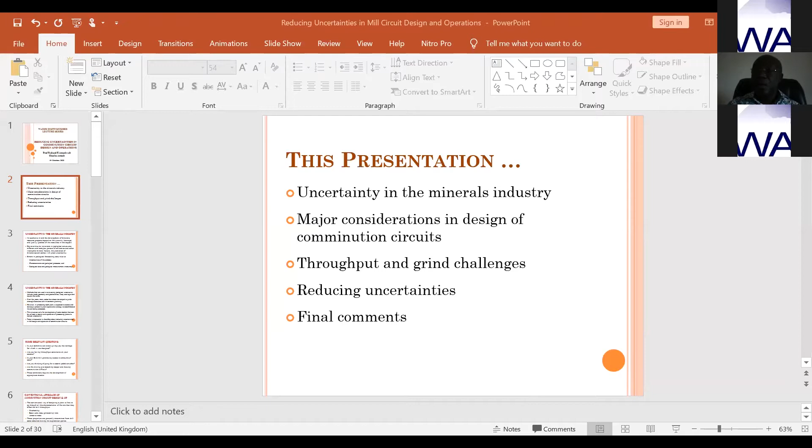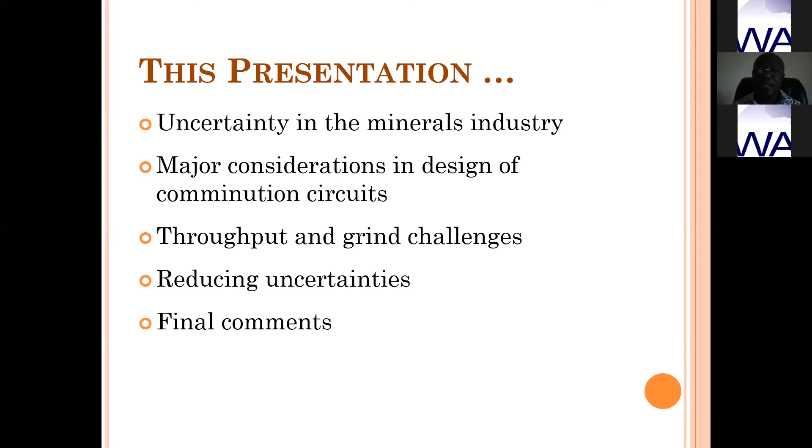As we are all aware, investments in the minerals industry normally depend on the tonnage available, and we are looking at uncertainties associated with issues in the minerals industry. We'll consider some design issues and talk about throughput and grind challenges that we face every day, and we will see how we can reduce some of these uncertainties based on work that has been done in several processing plants. I'll give some final comments.

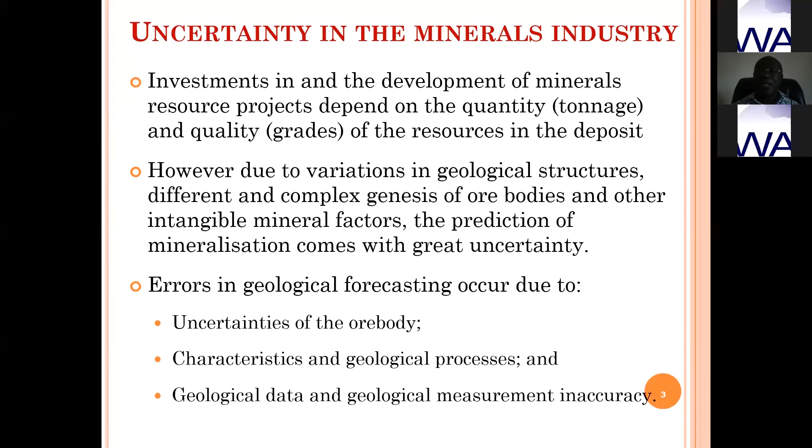We all know that investments and development in the minerals industry happen to be dependent on the tonnage available and also the grades. There are so many uncertainties associated with determining some of these variables, mainly because of uncertainties associated with the ore body itself, whether it is homogeneous or heterogeneous, and some geological processes that sometimes are not very clear to human beings. And of course, sometimes there are inaccuracies in the gathering of geological data and measurements. These uncertainties sometimes bring challenges, and human beings try to find solutions.

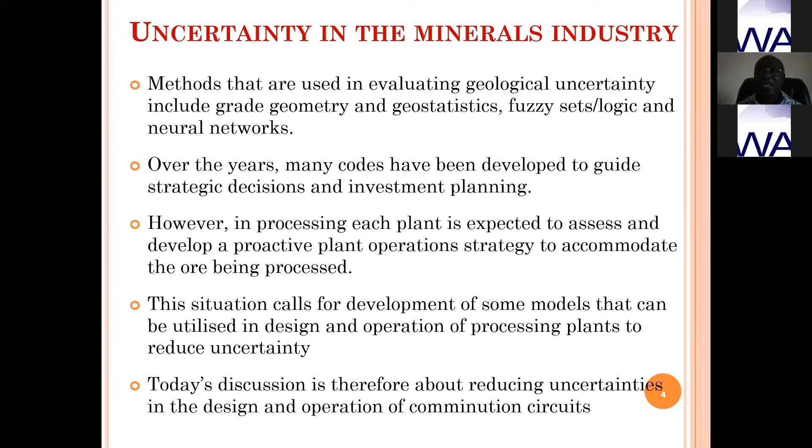In the geological and mining arena, several models have been developed. People use geostatistics, fuzzy logic, neural networks, and over the years some codes have been developed, some from the US, Australia, Britain, and several places, which guide strategic decisions and investment planning. But normally when it gets to the minerals industry, especially when you go to the plant, we don't have many models that help us reduce uncertainty in the design and operation of comminution circuits. Therefore, this presentation is about some of the work that has been done and how we can maybe steal some ideas here and there to help us run our comminution plants.

Some relevant questions come, and maybe these are rhetorical. Is your comminution plant or circuit giving you the tonnage for which it was designed? There are times you design a comminution circuit to deliver 1,000 tons per hour, and for 6 months you have not even been able to get 900 tons. Do you have constraints on your screens? How do you select your screens? For instance, is your SAG mill generating excessive amounts of scats? And are you thinking of going for a second pebble crusher?

Are your mining pits becoming deep? And does it make comminution difficult? These conditions require the development of appropriate models to solve them.

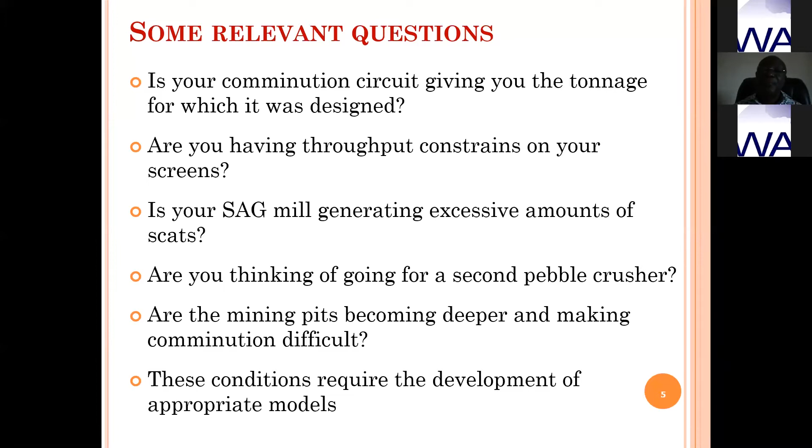Conventionally, when people in the projects team are asked to develop a comminution circuit, the normal thing would be to go for core samples, sometimes quarter cores, half cores, and the grindability is established, the crushability is established, and also the abrasive index, so that we will know the energy required to go into the comminution circuit, in addition to how the rocks would play on the liners regarding wear.

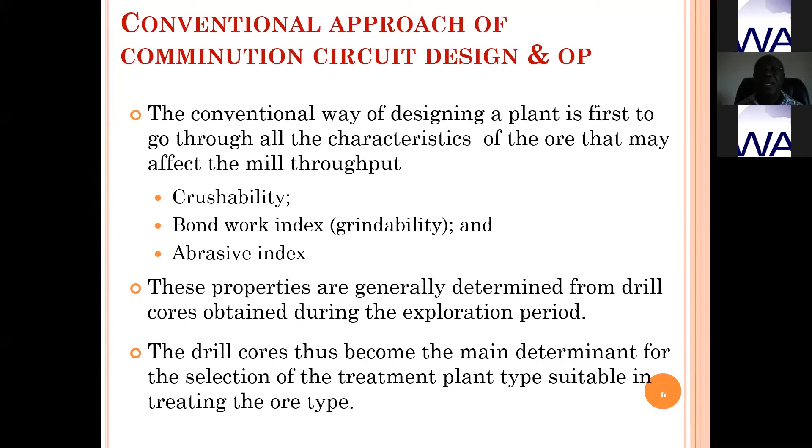These properties work very well, but you and I would agree that all characteristics change as we move from one horizon to the other. And it gets to a point where the initial inputs for the development of the plant virtually become null and void, and it becomes necessary to rethink this whole business.

There are times, as pits become deeper, rocks become harder, and they impact negatively on mill throughput. For most processing plants, if something like that happens, the rocks have become harder, the Bond work index has changed, and therefore the available energy from the mill motor is not able to grind to the size that we want.

One of the simplest ways would be to push in additional energy. Go for some mobile crushers, crush finer, so that we can feed the system and get it going.

Since we know that sometimes you may have to bring in a mobile crusher, or sometimes you may even think of a secondary crusher to support the SAG mill operations, it is important that we think through this process before we hit the ground to design the plant.

Because in some cases, maybe 5 years down the road, 10 years down the road, you'll still have some ore available. They have become harder. You want to bring in a secondary crusher, but the space has not been made available for such a machine. You don't have the footprint.

And even if you have it, sometimes the place where you will put your conveyor so that this secondary crusher can be fed and also for it to deliver its product, becomes a problem.

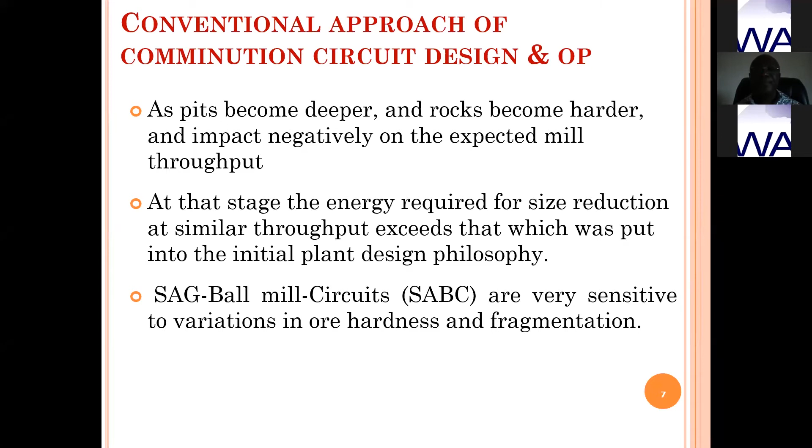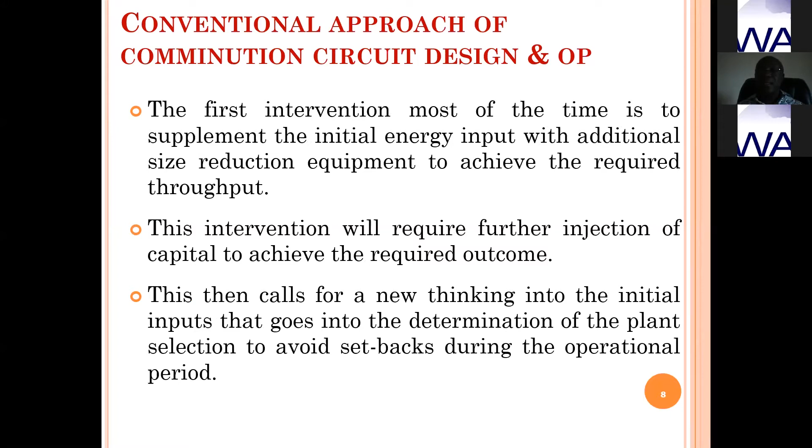So you go in for more energy, you inject more capital, sometimes unplanned, and these things require that we rethink to avoid setbacks. Let's look at the typical horizon.

That is practically not possible. But if you are able to get drill cores from between 200 and 300 meters, then it will help you to predict the type of material that you have to process and the strategies you can put in place to take care of it. The question comes up that, assuming you drill to 250 meters and you use the information available to design your plant,

what happens if the pit becomes deeper and you go down to, let's say, 300 or 350, because these are realities. Pits can go down sometimes even to 350, 400 meters.

The fact that you did not take samples at that depth to analyze them and to incorporate them into the plant design brings an uncertainty. So how do we handle such uncertainties? And what effect has it got on the comminution circuit?

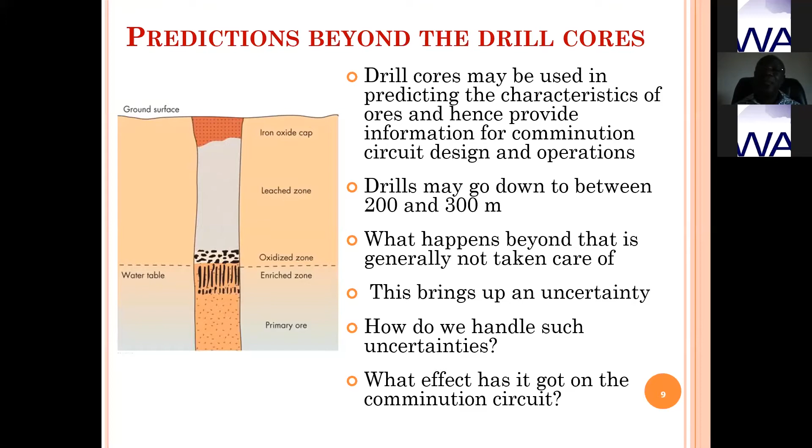Let us consider some studies that we have conducted and some new approaches that people have brought up. And in my case, some of the research I've also done in the area.

We looked at a plant where before the design came up, drilling was done up to 273 meters. And the mineralogical investigations were done and the geometallurgical mapping was developed. The recommendation was a SAG ball mill circuit, SABC.

And after running the plant for about 5 years, we realized that the plant could not deliver the tonnage that it was expected to deliver. An expansion project was commissioned, and for the initial 6 months after expansion, problems, and more problems.

Can we avoid such situations? By looking ahead in our design.

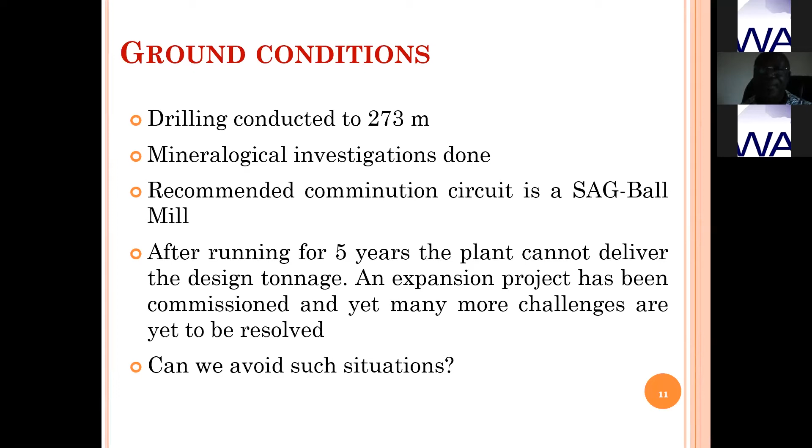These are some mineralogical investigations that were done as part of this study from the core samples that came. And you can see that we have fresh material. This is maybe sample A. You can see that the minerals are predominantly feldspar and quartz, making up almost about 80% of the material.

This is fresh material. And from the geometallurgical point of view, this is going to be a very hard rock, fresh rock. And the bond index of these materials were always above 16 kilowatt hours per ton.

Then this profile also was developed where we had minimal quartz, minimal feldspar, but a lot of goethite, that is iron hydroxides, hematite, kaolinite, pyroxene, chlorite. These are all very weathered material, very soft material, indicating that some parts of the ore body were very weathered and soft, sometimes with work indices below 10.

And then you have the very hard ones with work indices beyond 15. And then we have the transition material, which have a mix of hard rock and soft rock together.

If you see the mineralogy this way, then we have to be informed that we have to plan ahead, looking at the fact that we have a lot of fresh rock, which would one day require excessive energy to reduce particle size. These ones are easy, you can always grind and then mill easily without a problem.

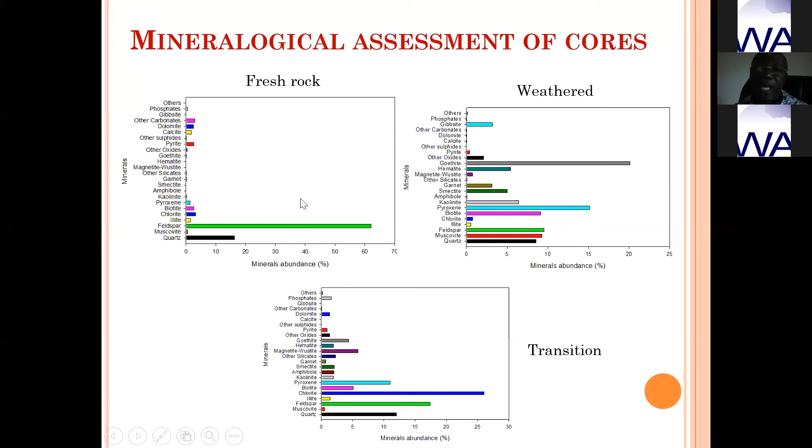But the fact that we have some ores that contain about 60% feldspar, very hard rock, almost about 15% quartz, also very hard, gives us an indication that we have to plan and make provision for hard rocks along the line.

From that study, we took about 45 core samples down to a depth of about 242 meters, and we performed bond work analysis on each of the core samples and came up with a relationship between the bond work index and the depth.

Excel gave us a nice equation. Thank God I didn't have to do this calculation. It is normally known that if you are using a polynomial equation, the more you go up on the order, the higher the accuracy, because the R squared becomes better.

But in this discussion, we realized that after modeling with a polynomial of order 2, 3, and 4, order 2 was the best because it had a lower error. For order 2, the mean square error was 0.5. For order 3, the mean square error became much higher, that is 2.4. And for order 4, it was even worse.

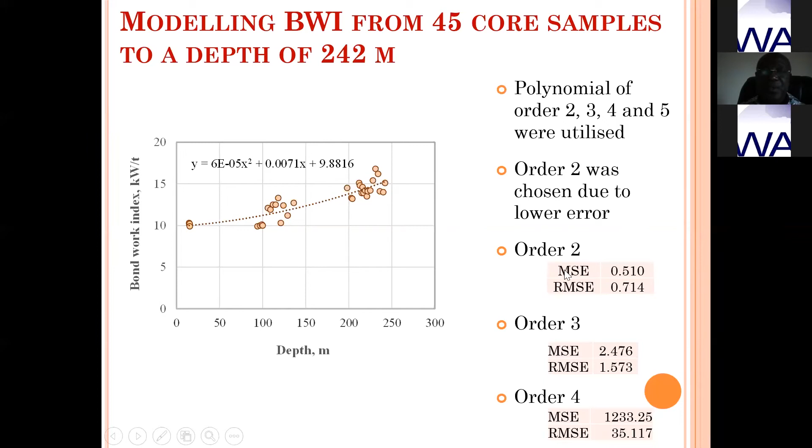So after running the statistical model, we arrived at the fact that it is better to use an order 2 polynomial to come up with the equation, and this is what you see in the graph here. This is the process that we went through.

Normally in this statistical modeling, you start with training data, which will take about 80% of the data that you have, and you develop from there. So out of the various core samples that we had, from a depth of about 14.6 meters down to 240 meters, we developed the bond work indices in the lab and then used the equation we developed to predict.

It came out clearly that there was some amount of relationship between the predicted and the one observed by ground truth. The error margins were developed and the error squared comes here, giving us a mean square error of 0.7. The root mean square error is here, and the various parameters to check for quality are also here, the R squared.

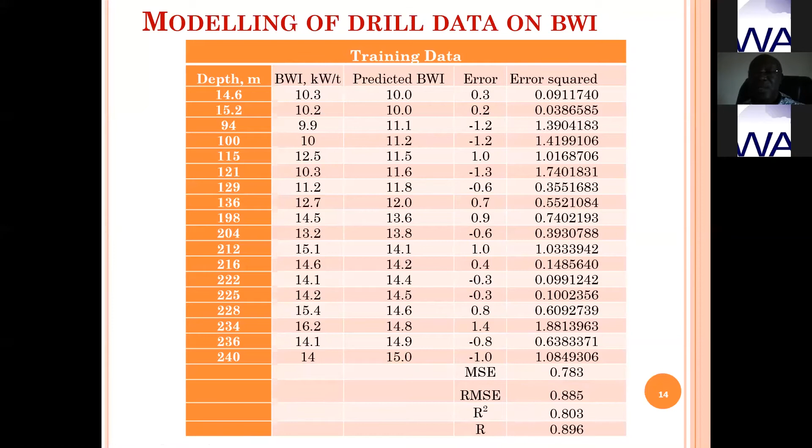After working with 80% of the data, we wanted to validate the results on the remaining 20% to see whether this equation works well for us. So in the validation model, we worked from a depth of 243 meters right down to 273. These are the ones obtained in the lab, and these are the ones that were predicted.

It can be seen that there is near parity between them. For instance, here, the one developed in the lab gave us 15.1 as bond work index, and the predicted one was 15.2, an almost close figure. Some of them went off a little bit, but to a large extent, the mean square error was 0.5, which is very acceptable in situations like this.

Based on the success of the validation work, we tried to find out, assuming you drill down to 273 meters, what will happen as the pit goes deeper. For instance, what would be the work index at 280 meters, 300 meters, 350 meters? It was realized, based on the model, that if you intend to work your pits to a depth of about 350 meters, you should expect to meet rocks of hardness about 19.7.

This means that when you are building your plant, 350 meters down, depending on the mine plan, could be 10 years or 5 years down the road, depending on pit development. But the metallurgist should have it in mind that one day along the line, if the plant doesn't close down, you'll meet rocks of hardness about 19.7 BWI, that is the bond work index in kilowatt hours per ton.

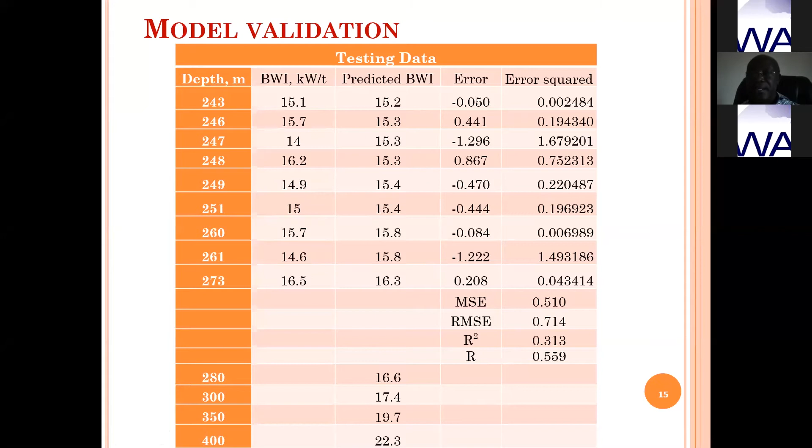The savings are that, for those of you in drilling, it is clear that the approximate cost of carrying out a diamond drill campaign is about $250 per meter. It varies from one region to the other, of course. And reverse circulation drilling is about $100 per meter.

So by using this model, it comes to show that there is big savings. By moving to even 250 meters, it will cost you about $62,500. And then you model the rest up to 500 meters, and there are big savings in both diamond drill and reverse drilling campaigns.

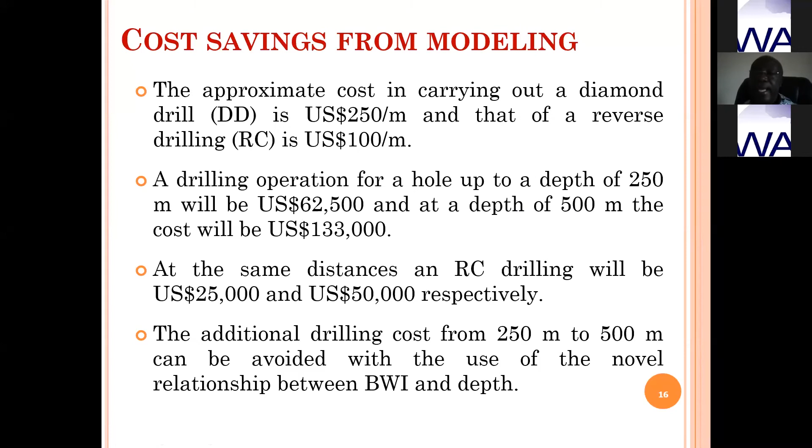Therefore, this model would bring big energy savings and big money savings, in particular if we decide to model the results we get up to the initial drilling campaign level, and then try to find out what we can get as the pits become deeper. There are also some other matters arising.

So the issue is, does the mine intend to develop the pit to a depth of, say, about 350 meters? If so, then the work index could go up to 19.7. Can the circuit handle it?

SAG mills are not designed for very hard material. When materials are hard, in mineral processing we are looking at a bond work index of about 14 kilowatt hours per ton. So when we talk about 19.7, it means we are almost getting to the very hard zone, and SAG mills cannot handle this material. In that situation, how can we help the plant to work?

We will look at some scenarios and see how best we can go around it. One major thing is that if the mills are not working very well, it means the circulating load becomes extremely high, especially if you don't cut back on tonnage. But which mine in this world right now really wants to cut back on tonnage? Everybody wants to increase tonnage because grades are low and most plants are tonnage driven.

So it is important to do some more detailed analysis to find out whether the material you are getting is uniform, so the work index is attributable to virtually all the material, or whether there are some individual rock types that are very hard. This question is important because it will inform sometimes the kind of method you have to use. These are critical questions to answer, and in answering them, we come up with some models.

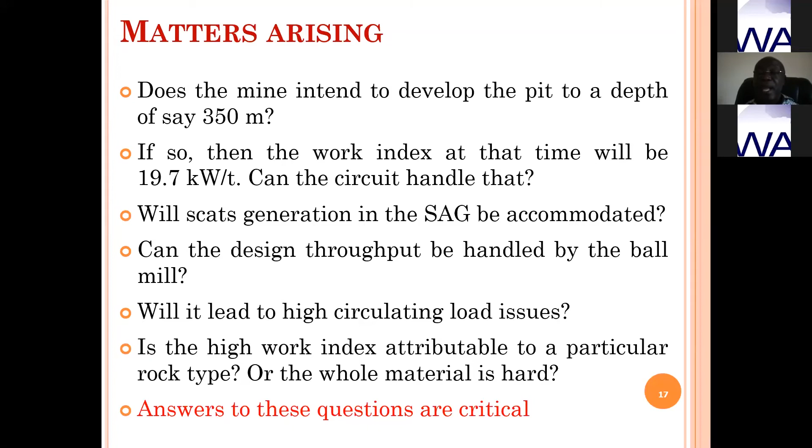The mill motor has some constraints. Anybody who has worked as a plant design person or a project metallurgist is very familiar with this equation. It's a very basic equation in minerals engineering. We are saying that the energy that goes into the mill motor, normally this E, is the energy available for milling, and it's equal to 10 times the work index

times 1 over the square root of the product particle size, minus 1 over the square root of the feed particle size, times the tonnage, thanks to Bond. So in a situation where we have fixed energy E, the mill motor has already been bought, installed, coupled to the mill, giving room for about 10% for pinion transfer.

It has been established, so the energy available on the plant is fixed. So if work index becomes higher as you go deeper in a pit, it means you may have to sacrifice either the product particle size, the feed particle size, or the tonnage. Most mines will not want to sacrifice tonnage. Push the tons - that is the order of the day.

Can we sacrifice product particle size? If it's a leaching plant, the material is going for leaching - maybe we want 106 microns because that will help us leach well within 24 hours and deliver the goods. So we don't want to touch it. So the feed becomes one area that we can touch. And another one is, can we find a way of modifying this work index so that by the time it moves from the pit to the plant...

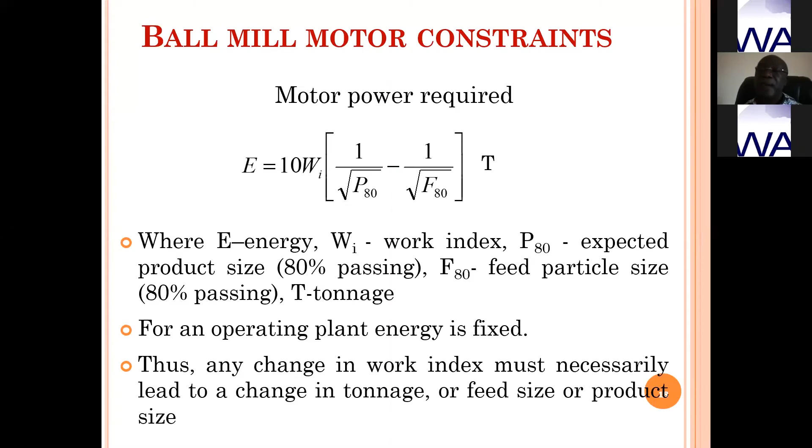In anticipation of hard rocks, we have to do good mine planning, and apart from that, it's important to create appropriate scenarios. The first scenario is the mine-to-mill concept, which helps us solve the problem in the pit. The other two scenarios are planning with a secondary crusher where the rocks are virtually similar in hardness, and the segregated crushing system, where some rocks are very hard and some are relatively soft.

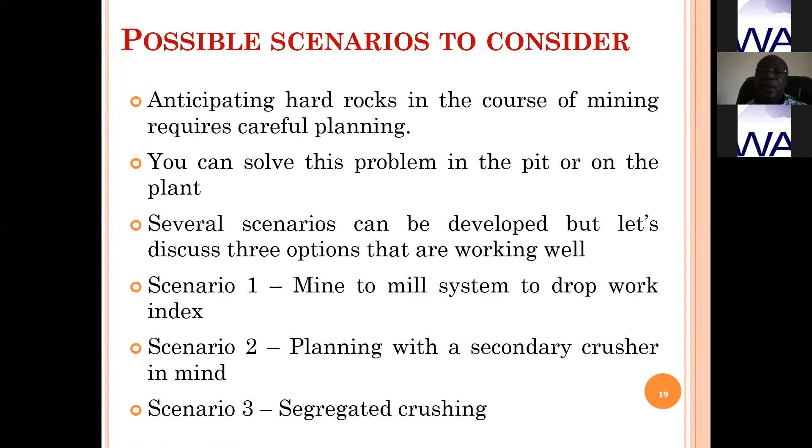The mine-to-mill concept has been very well developed over the years, thanks to great researchers in the field like Eloranta, who came up with some of these initial concepts. In the mine-to-mill concept, we say you can change the work index by changing the powder factor for blasting - that means you modify the properties of the material inside the pit before it gets to the plant.

Work done by several researchers shows that for a mine with an in-situ rock strength of about 14.5, it is possible to drop the work index from 14.5 to almost about 4 just by changing the powder factors. The miners will talk about specific energy. So here we are trying to look at changing the specific energy used in blasting so we can get smaller fragments.

It's not only smaller fragments that we are looking at, but depending on how the bench heights are developed, we can get more energy into the rocks, which will generate micro cracks. And the micro cracking makes it easier for the material to be milled.

Of course, I don't expect anybody to increase powder factor to about 1.6. That may even pull down the offices of the mines. But I want to believe that if you can reduce the work index from 14.5 down to even 10 or 8, so long as the range of powder factors is within that which your environmental protection agency in the specific area would allow you to work.

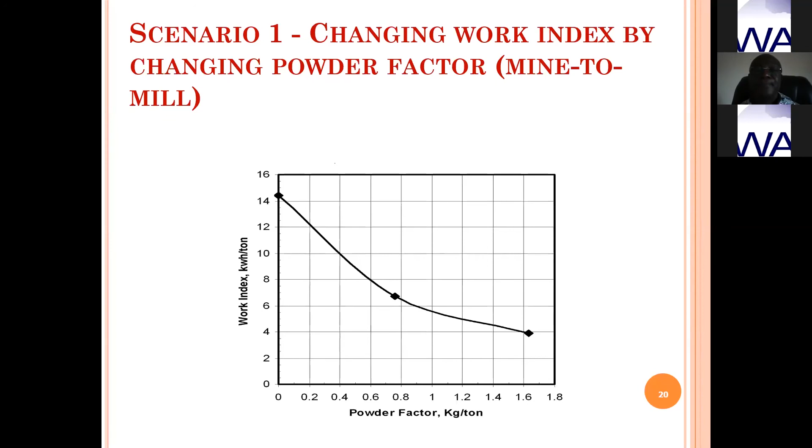Fundamentally, there are 3 ways by which we can change energy consumed on a processing plant. And that is what the mine-to-mill concept addresses. You can change the feed size to the primary crusher.

If, let's say, initially you blast and your P80 after blasting is about 800 mm, and based on the 800 mm, you'll have a primary crusher that is supposed to discharge 150 mm. Then it means that if you're able to generate more 150 mm through blasting, then a lot more material can bypass the primary crusher. And then you can save some energy for the primary crusher and also make more material available for the next stage of the operation.

Again, you can decrease work index by additional micro and macro fracturing. And that is what we were talking about by increasing powder factors and making sure that you drop the work index inside the pit before it gets to the plant.

And once the feed sizes have been reduced, then you can bypass several stages of crushing. So for instance, if originally your P80 after blasting was 800 mm, and you are able to bring it down to, let's say, 600 mm, and then create more fines lower than 150 mm, which is supposed to be the primary crusher product, then it is possible that you can bypass about 40% of the blast material by the primary crusher. And a good percentage of this same material can also bypass even the secondary crusher if you have one.

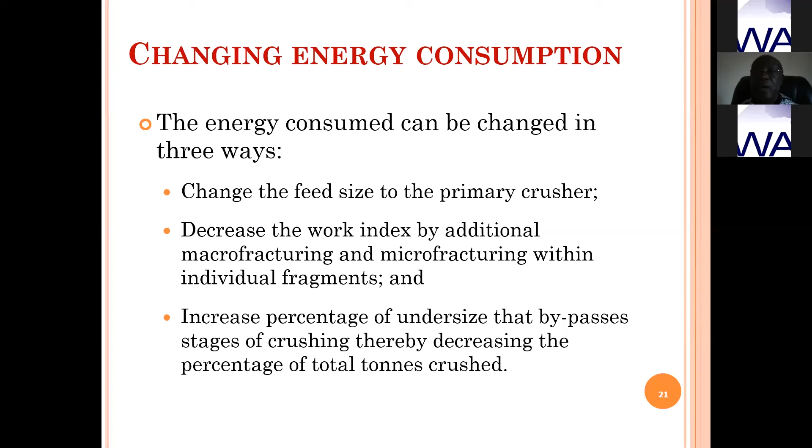The mine-to-mill concept is excellent, and it works very well, and it has worked very well in many mining companies. At the personal level, I've helped with mine-to-mill concept establishment in about 3 different mines, and in all cases, it worked well.

One challenge that I have found with the mine-to-mill concept, which we may have to think about as we apply it, is the fact that in some areas, the gold occurs in very weak zones. And therefore, as you blast, those areas fragment finer by virtue of the fact that they are already weak zones.

So sometimes when it becomes that fine, then it becomes possible for these fines to be lost in transportation so that they do not get a chance even to report on the right part for feeding into the processing plant. So there's a potential for excessive reduction of rock size to lead to grade reconciliation challenges.

Recently, I was part of a team that helped to resolve one problem on a mine. After blasting, the grade was very high. Let me give it a hypothetical figure. Underground stuff, 6 grams per ton. By the time it gets to the ROM pad, the grade gets to almost 4.2 or less.

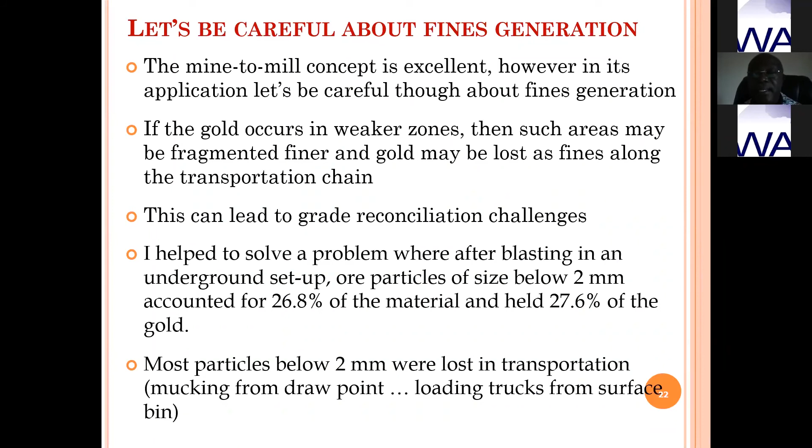Eloranta's research has indicated that as we apply the mine-to-mill concept, we reduce processing costs because the rocks become softer, and therefore we can grind more at lower cost. Of course, your drilling and blasting costs would increase, but we all know that grinding is one of the most expensive operations on a processing plant. Therefore, if you can even save 5% in grinding cost, and you increase drilling and blasting costs by 20%, it is still savings. At the end of the day, the total cost of running the plant becomes lower.

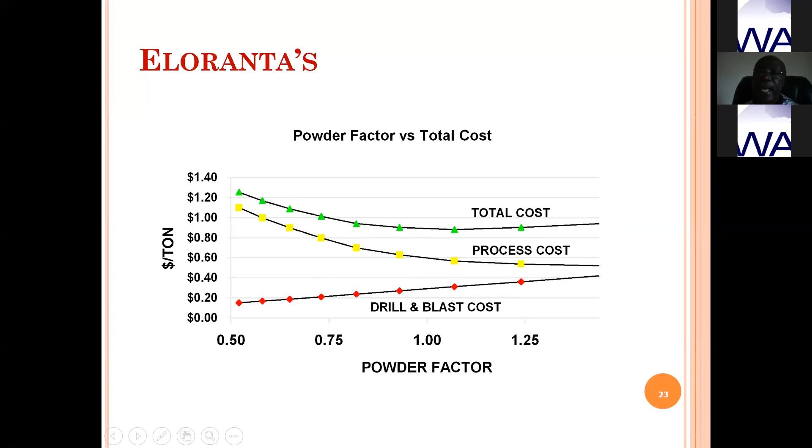So the mine-to-mill concept is very good, and we have to apply it, of course, with the caution that I have indicated.

Another scenario that comes to play is when you have individual rocks with minimal variations in work indices. For instance, when you feed your mill, from Bond's equation you know that if I feed material of size, let's say 50mm, to my mill, I'm sure to get my discharge of 106 microns because the energy available can support that. If that works for you, and you realize your SAG mill needs finer material, then the best would be to possibly consider a secondary crusher, so that after primary crushing, you reduce the material size to the calculated size before you feed your mills. This size you can always get from the Bond equation, which we will look at again.

This model is good. It looks only at size and not the work index. Many mines have tried it with success.

One major problem that we have to think through as we apply this method is that we have to make provision for a footprint for a secondary crusher as we design the plant. Because if we go ahead and design the plant without making room for that secondary crusher, then by the time the rocks become hard and we need to install a secondary crusher, we would realize that there is no position for it on the plant as far as the design is concerned. There is no way by which we can build a conveyor belt system from the primary crusher discharge point to the secondary crusher, and there's no direct link to build a conveyor to feed the SAG mill.

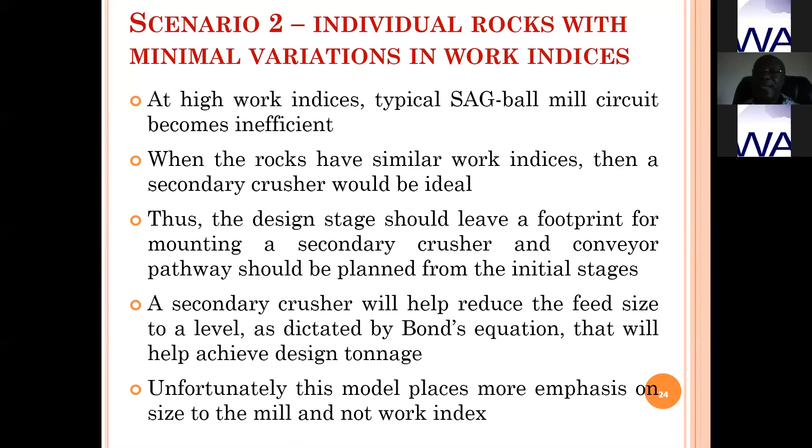That becomes a problem. So it is important as metallurgists, and of course as plant designers, that we try in the drawings to leave a footprint for a secondary crusher, even if at the beginning we would not need it. So that one day, if we have to put a machine like that there, we will not be found wanting because there's no pathway to install conveyors.

Let us look at the last one, the third scenario, where we have rock types with very wide variations in work index. There are times on a particular concession where you may have your weathered material with bond work index sometimes even below 10 kilowatt hours per ton, and you may also have some materials with bond work index as high as 15.

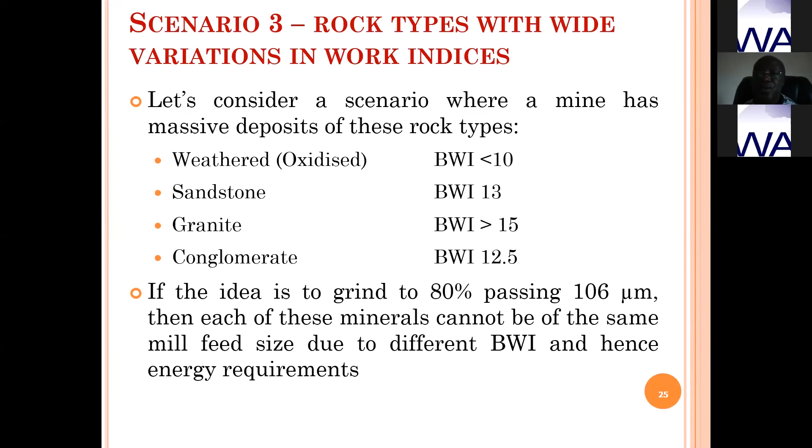This means that the bond work index has become a major variable here. It is not just enough saying that we have reduced particle size, and therefore when it goes into the mill, it should be able to grind fine enough for us. Because the energy required to grind material with work index above 15 is totally different from the energy required for material with work index below 10. So it becomes necessary for us to consider the equation again.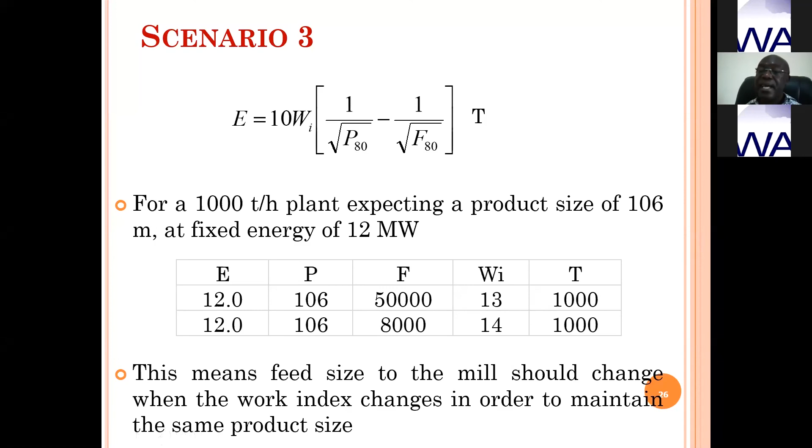Just by changing work index to 14, it becomes necessary that you get a feed particle size of 8,000 microns or 8 mm to feed your circuit if you are anticipating a product P80 of 106. It means you cannot just throw all the material into one secondary crusher and expect that at the end of the day you achieve the feed particle size required for milling.

That is where segregated crushing comes in. This Excel sheet with the appropriate data shows that for the scenario we are looking at, energy available is 12,000, product particle size 106 microns. If the work index is 11 and you give it a feed particle size of 30 mm, you are sure that you get more than 1,000 tons per hour.

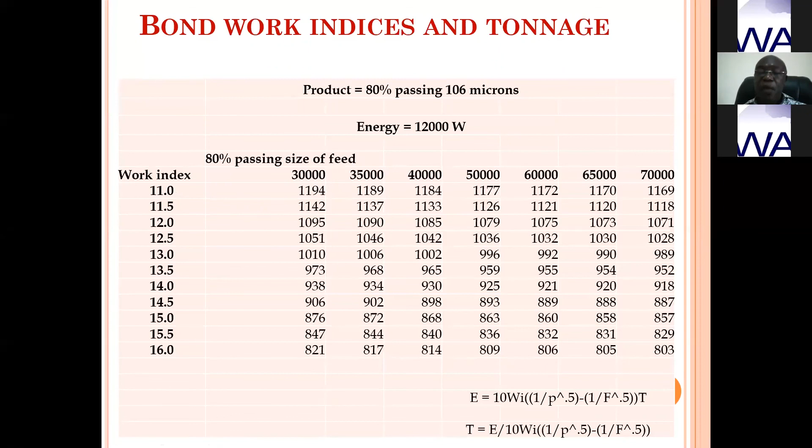That means if you are expecting to get 1,000 tons per hour, then you cannot play with the sizes and say all my particles are of size 40 mm, go inside and come out as 106 microns. It is important for us to look at each of the materials of various work indices, especially if we can mine them separately or they collect separately, so that we feed them into different mobile crushers.

So for instance, you have material of work index above 15, and you know that for this material I need to crush down to almost 12 mm before I feed my plant and get a product particle size of 106 microns. For the weathered material, even if I throw in 80 mm, I'm sure that by the time it comes out it will still be 106 microns.

For the 13 bond work index, I know that if I'm able to get a size of 50 mm, then I can get my product particle size of 106 microns. So this becomes a little bit expensive, but then it helps you to run a very good plant, and you can go to sleep while the plant works, because the hard material of work index above 15 has been crushed to maybe 12 mm already.

The weathered material is coming in at maybe 80 mm, and this material of 13 work index is coming in at 50 mm. So 12 mm here, 80 mm here, 50 mm here, all get onto the crushed ore stockpile. And all these, by calculation and design, you are sure would give you 106 microns when it gets into the mill.

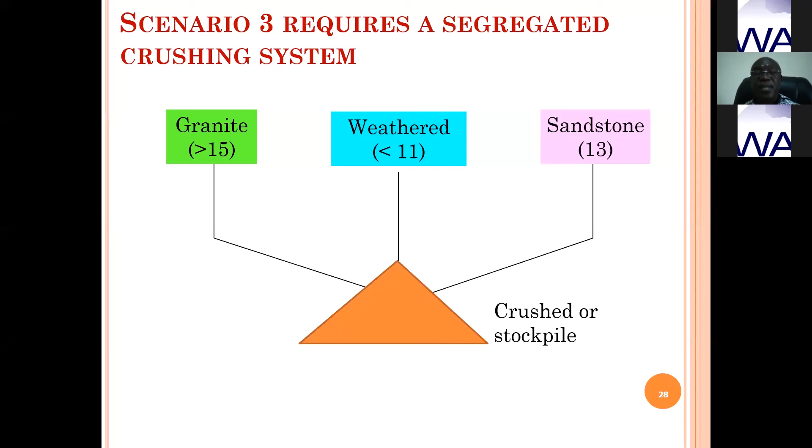My final comments: in this presentation we looked at ground truthing and modeling of bond index data from drill cores, and based on that, a model was developed which brought about some savings from a drilling campaign so that you can predict what will happen down there as rocks become harder and pits become deeper. It also tried to reduce the uncertainties associated with increases in rock strength and their influence on a milling circuit based on three scenarios: mine to mill with caution, and the case of the secondary crusher, which requires that we give space in the plant design for it.

For instance, based on the mine plan, you know that in 5 years' time we are going to reach this zone, so maybe by the end of the third year your next major budget should make room for a secondary crusher, which has already got a footprint. Therefore there will be no problem with conveying in and out of that space. And then the segregated crushing system allows you to reduce each particular rock to the size such that when it goes into the mill, it will give you the appropriate product particle size.